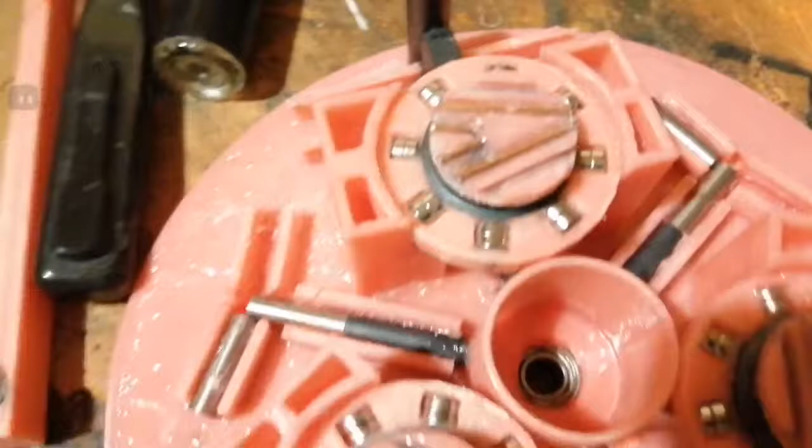So I made this actuator. Obviously I need to make a top bearing holder to stabilise this, because this thing just flops about in the bottom bearing, which is out in the middle down there. One bearing is not sufficient to hold this thing.

So I'm starting to hit a few design constraints and problems. I expected I would, because I was putting too many big magnets on here, so I'm in two minds right now about whether to go back to the drawing board and redesign this in a different way, because this was designed just for testing purposes really, for the other magnets. It wasn't designed for these great big bulky concentrics.

The problem I get is the interference, because if I add too much magnetic flux, especially if there's three magnets like in the stator, right...

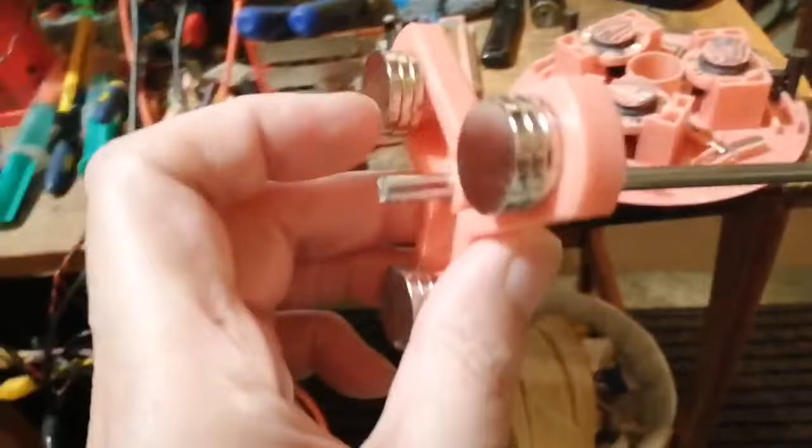Just give me a sec, I need to take the drive shaft out because I want to show you what I mean.

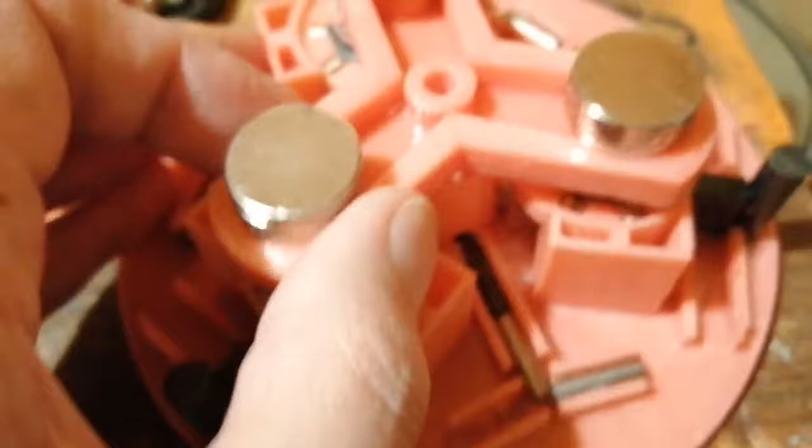Sorry about this, I'm taking the drive shaft out because the shaft's too long and it hits the table. So if I stick this on here like this, we have pretty good coupling actually.

We can see it deflecting on the thing, but the problem is, even when this is in the neutral position... oops, hang on a minute.

There's a reason I took it off the drive shaft, and that's because I want to be able to put it in a different position without it snapping in, and the bearing would make it spin a bit, if I can get this in the middle where I want it to be.

But basically what happens when it's in the middle like this is we get interference, as in it's good, it's stabilised now. Where's my gauge gone? I don't know where my magnetic gauge has gone now. Oh, there it is.

So even with this in the off position, we are still getting some deflection on here, which is what I'm talking about, the interference. Because even though the magnets are all the same pole, and because the magnets are more powerful now, I'm getting unwanted coupling, so it's still basically on when I want it to be off, if you see what I mean.

So this is one of the issues, because the spacing is not quite right, and I can't get these things far enough away. That's the problem.

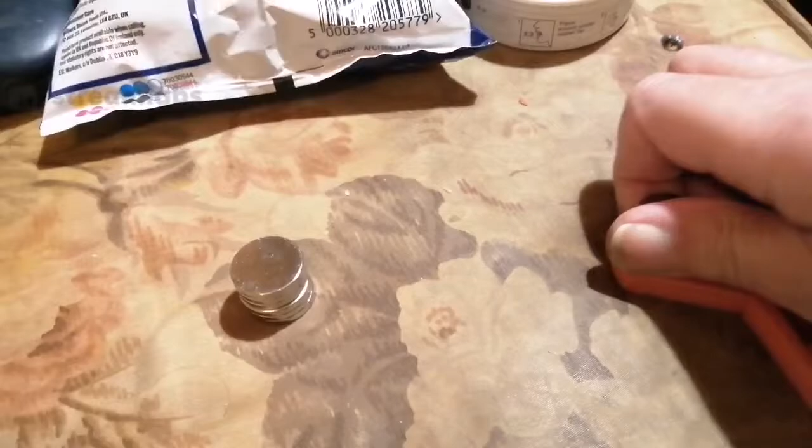But it works fine if I take all these extra magnets off, because I put them on the back. I'm trying to do this without actually pinching my fingers... ouch! Which I did anyway. Ouch!

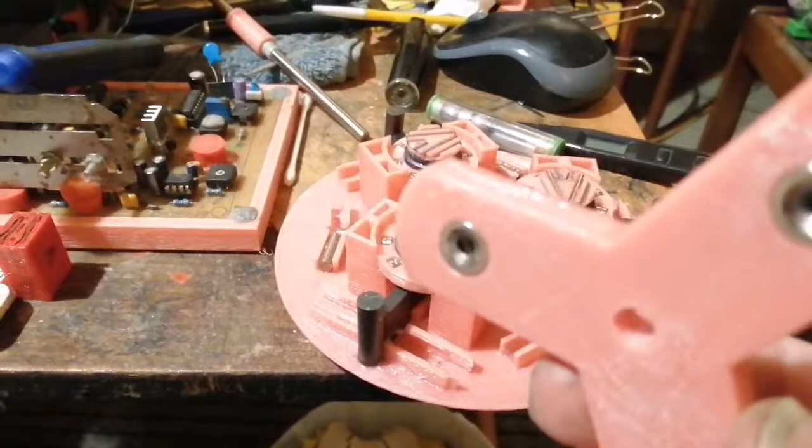Right, so just with the three -- there's actually three 10mm magnets in each one of these holes now, just those -- it behaves a lot better, but we don't get...

Hang on, we don't get a great deal of coupling through. Even when I tilt this back, there's not sufficient flux to give us enough through there.

This is what I'm talking about, it's because of the spacing. I need these concentrics ideally to be mounted instead of horizontally, they need to be mounted vertically with the piece of ferrite going through them instead of at the side, because I've got a coupling issue.

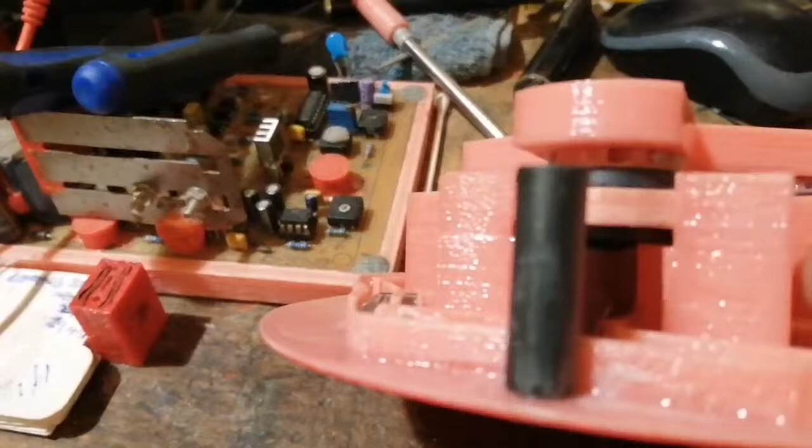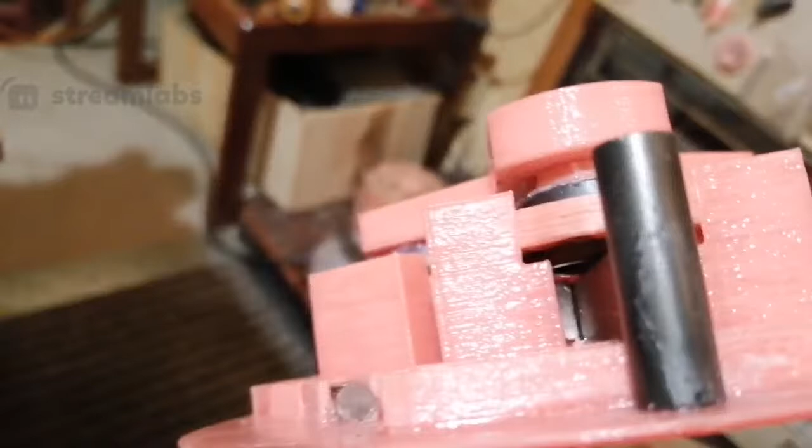You can't really see this, but if you look down there, there's a bit of ferrite sticking out the bottom of those concentrics. I don't know if I can get the light on it. You might be able to see it, onto that bit of ferrite bar. Yeah, you might be able to see it, there's a little bit of ferrite sticking down.

Now there's a bit of a gap on some of them as well, which is not great, because I did manage to find some bits of ferrite that was already cut, which were about the right length.

As I say, I'm not happy with it. The coupling is just not there, it's not good enough. If I add more magnets, I get too much flux, where it's basically on all the time. Because this thing needs to be either larger, or we need to have these concentrics on a different axis so that we don't get this interference problem, which is what we're getting.

If the magnets were perpendicular, as in pointing outwards instead of down, then we wouldn't get this cross field contamination, because that's what's happening. We're getting the fields merging, you see. We're getting a bit of cross field contamination because the magnetic fields aren't switching properly because of the space being so close.

So yeah, I thought I'd give you some heads up on what I'm going through at the moment, why I'm printing parts. I printed all these legs, these things. I made them quite lightweight so they wouldn't use a lot of plastic. The idea with these is that I would glue these.

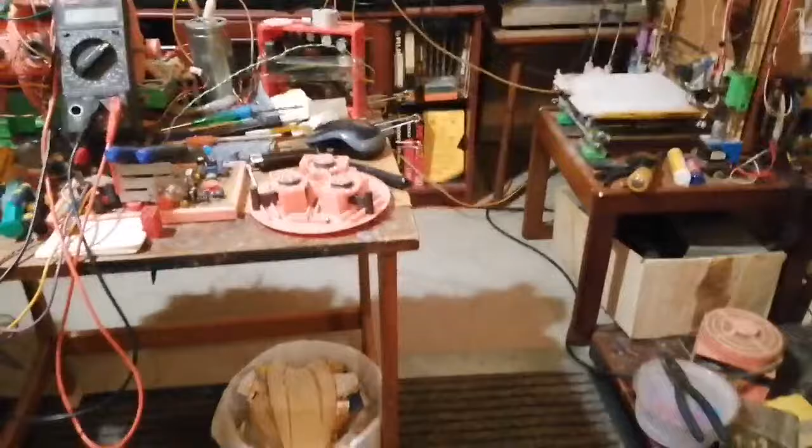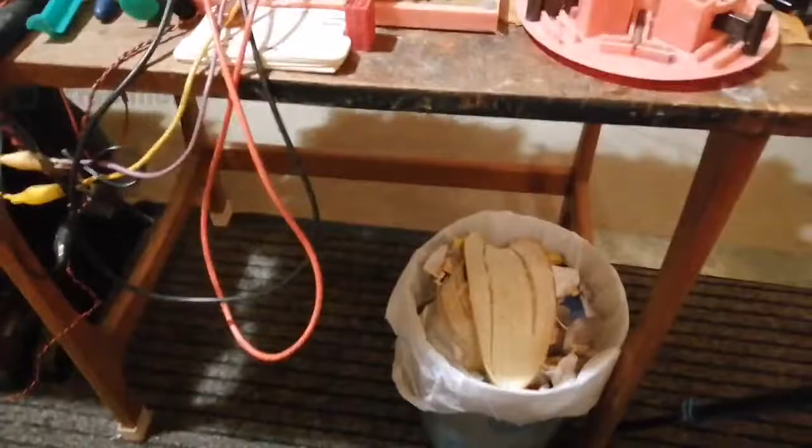Yeah, but if I can, maybe I just wanted to make this a quick video really, but just a minute, I'm just getting my camera stand. I just want to take the cover off a minute. I want to try to show you a little bit more, but hang on. Bloody thing. Alright.

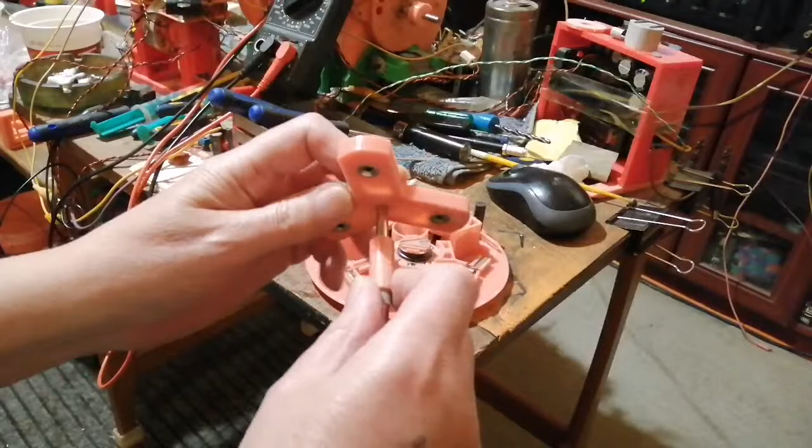So yeah, this is what happens when you change direction in midstream sort of thing, because that's what happened. I've got the stand on now. I designed this for a different setup, and now my setup has changed and my model hasn't, and I've been trying to adapt this model to suit. Well, obviously it's not going to work because it's too closely coupled.

I mean, yeah. And I don't like the fact that I've got to make this. I should show the SketchUp actually. Let me just show the SketchUp model while I'm at it, what I've done so far, you'll see what I mean. It's getting a little bit crazy.

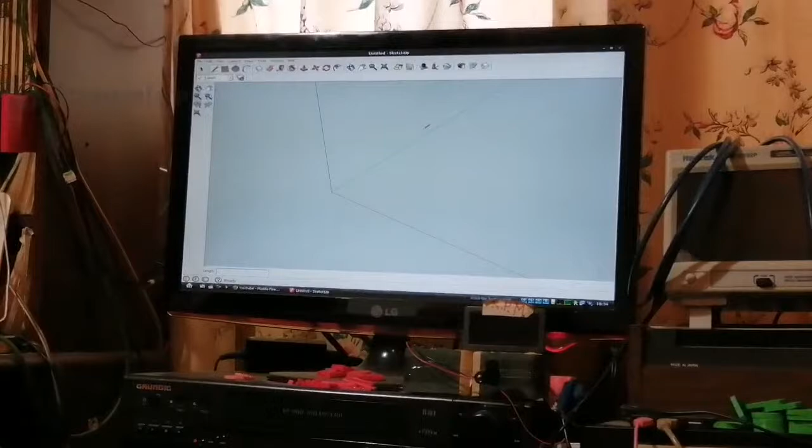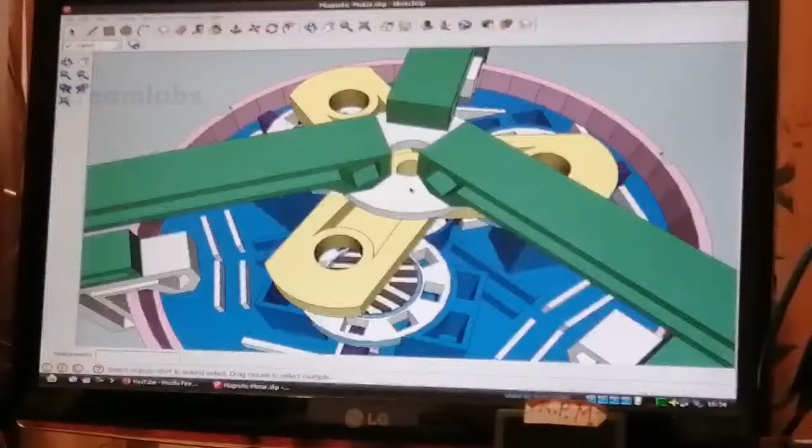Right, let's just zoom in a minute. Let me load it as well. You see what I mean? It's getting a little bit crazy. I've got this bearing, this white thing on top, for the bearing. Now I've got these great big overhanging arms which are supposed to be glued or double-sided taped on, or I could screw them on, or attach something on the backs of these to hold them together, but it's starting to look a bit crazy.

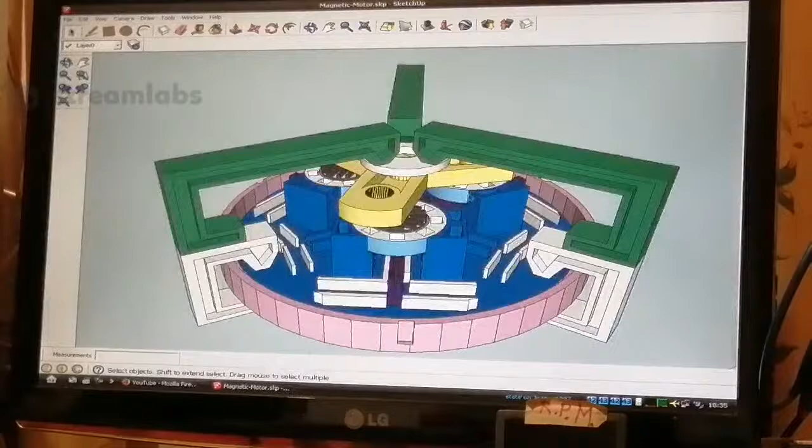So I was trying to adapt this thing, and then I thought, well, these magnets need to be bigger anyway, and I can't now. Then I realised, well, I can't go any higher now because I made the brackets.

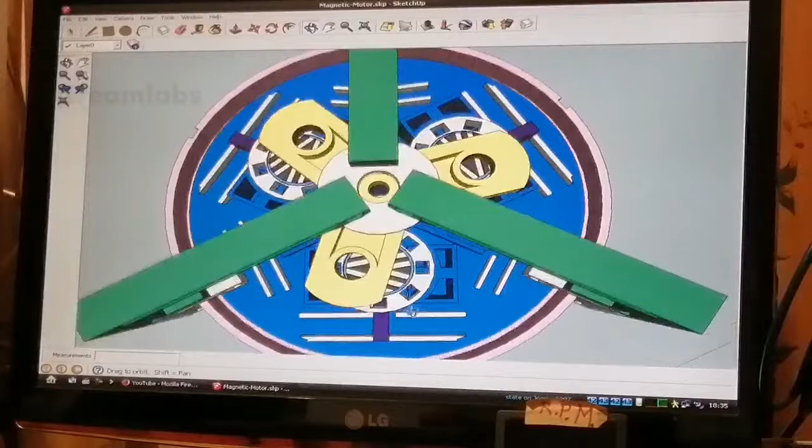So yeah, that's what I ended up with when I was prattling about. I'm thinking, oh my god, I'm just adapting, and it's like correcting errors over tops of other errors and trying to fix it.

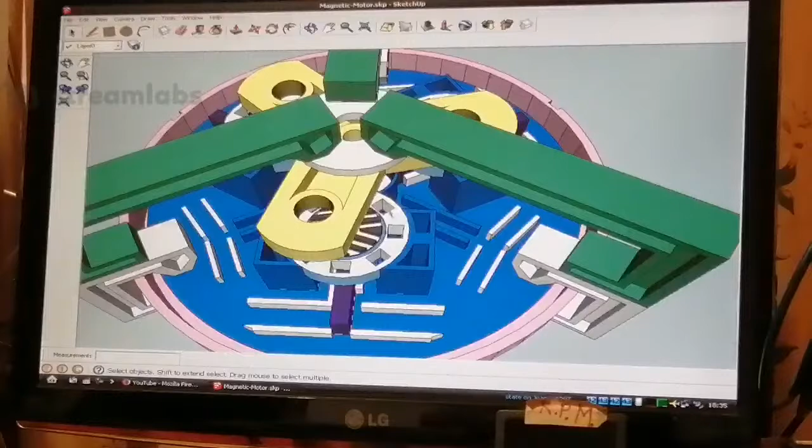I'm going to go back and remodel something completely new using the concentrics that I built. If I design something around the concentrics, I can make sure I don't have the magnetic field contamination problem.

But at the same time, I want to try this thing. I want to just get this top bracket done and see if it actually does anything, if it actually works. Because if it doesn't work, then I'm going to be wasting my time designing another model. You see, this is where I am right now.

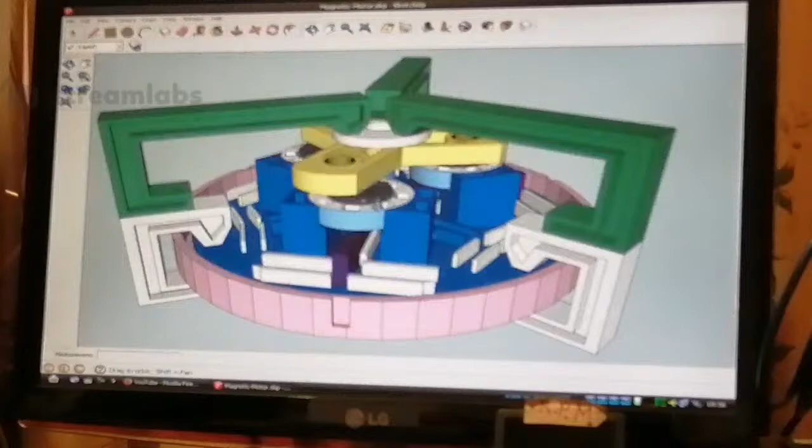My head's in a bit of a spin. So I'm thinking, can I make this thing work just to prove that it'll work? I think I might be able to, but there's all this extra flux going around with the bigger magnets, so I can't use the bigger magnets, I've got to use the smaller magnets.

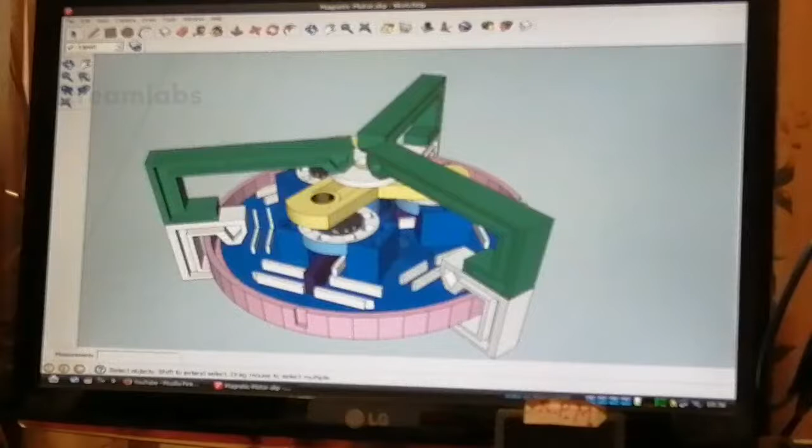And I've got to make sure these bearings run really easily, otherwise it won't run because the magnetic field is spilling over. You see, if you get two bars, and you stick a magnet on one bar and hold another bar next to it, that other bar is going to pick up that field.

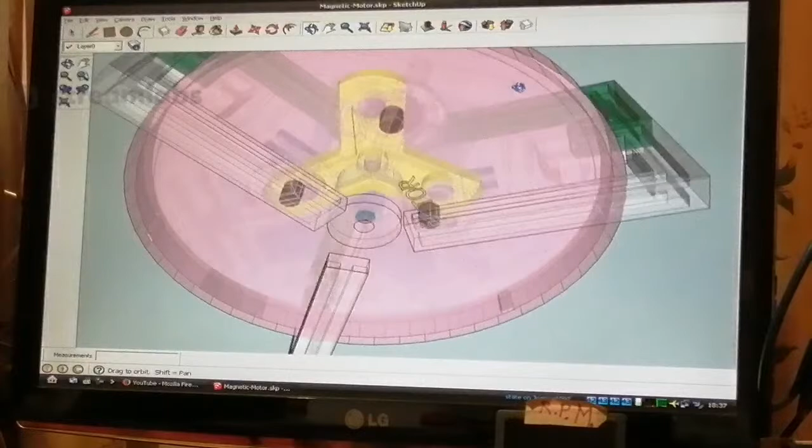If we go to X-ray view, those bars... oh, you can't even see them through the X-ray view. You can just about see them. Those bars go to the central axis point.

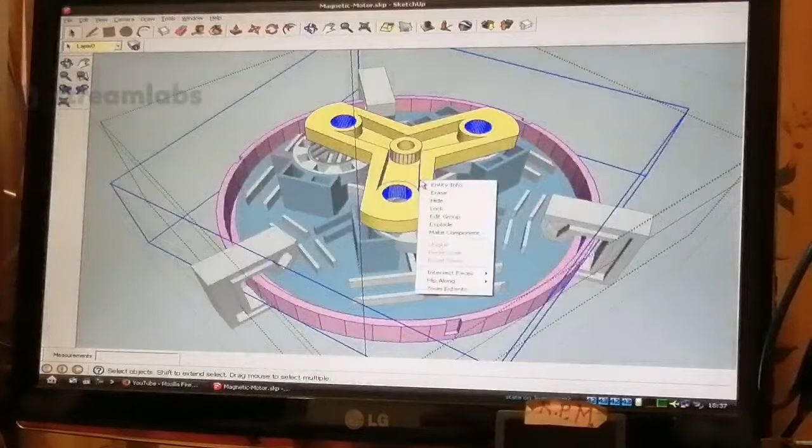Actually, let me back out a minute. Let me just hide some stuff and I'll show you what I mean. Edit group, hide that. Oops, I went and locked it. Silly me, undo lock. Just want to hide it.

So you can't see the bars on here because they're not... oh yes, they are, they're in there. Let's just go back out a minute and see if I can hide these things. I'll hide that.

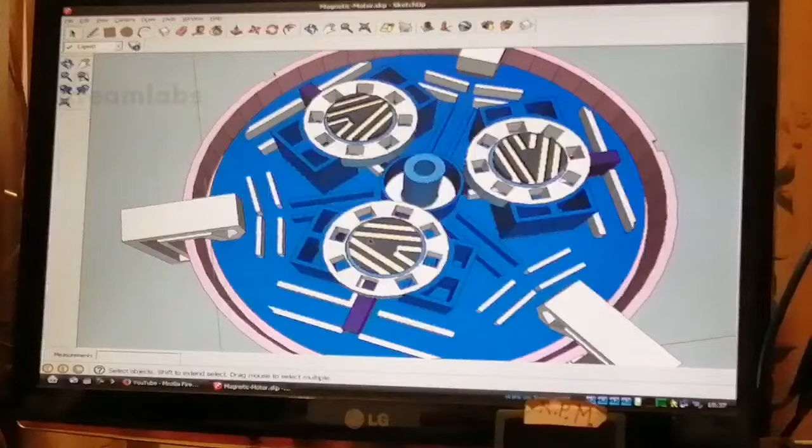Right, you see this bar down here? This is a bit of ferrite that's coupling to the concentrics. This bit of ferrite right here that's grey, now it's coupled onto the ferrite bar, which is the purple colour. This purple thing is a ferrite bar.

Now originally my design was to have the magnets in the middle. Do you remember? It was a vertical pillar with the magnets dropped down and coupling against these bars. Well, now I'm not using that method anymore.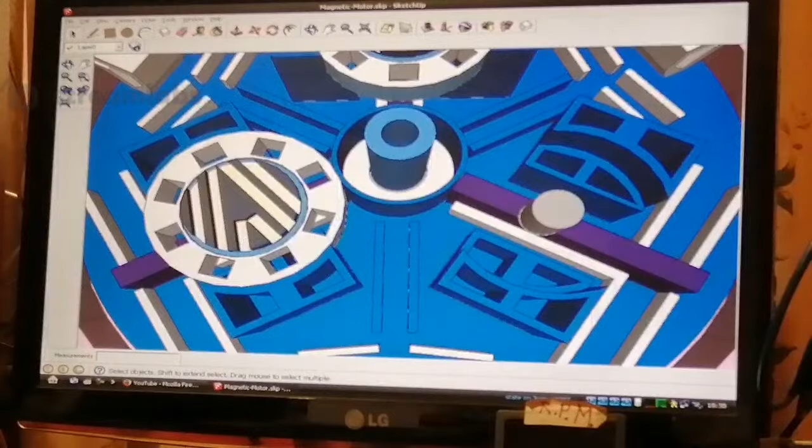These bars are picking up the magnetic field from the really big magnets that are on top here. Even across here, if the magnets are in the middle, these bars are still picking up the magnetism, you see. That's what the problem is.

Yeah, because the bigger the magnets are, the more these flipping bars pick it up, even when I don't want them to. So that's the issue I'm dealing with right now.

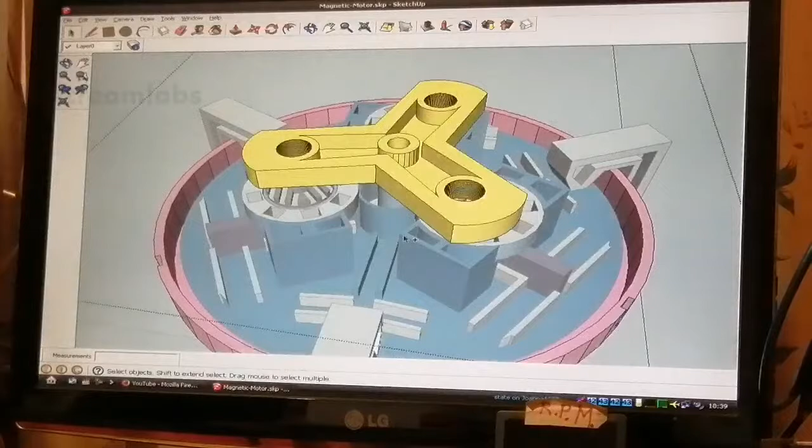So I'm just going to undo all that in a minute, go back to where I was. You can see my dilemma.

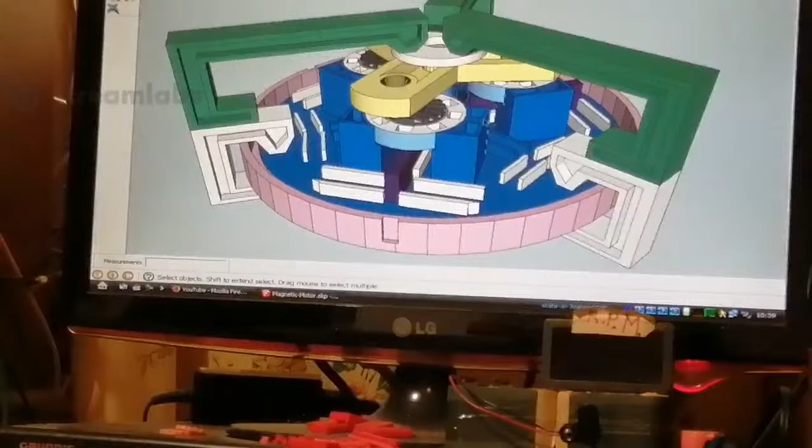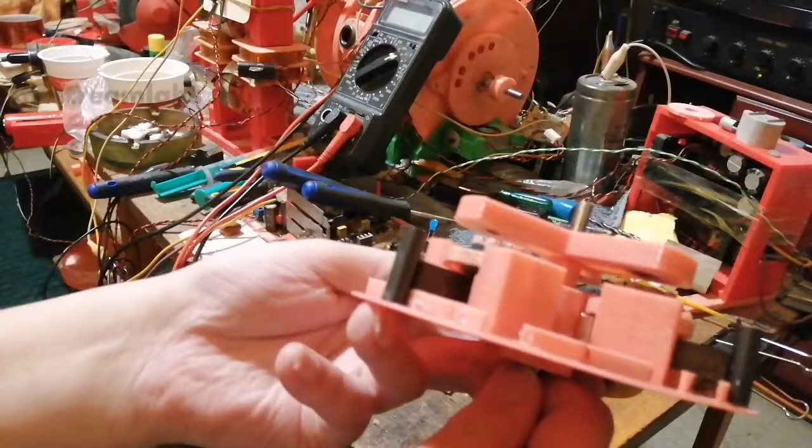So anyway, I'm going to sleep on it. Let me just zoom in again a minute, zoom out I mean. So at the moment, I haven't got a top bearing and it flops about, so I can spin it, but

I ain't got the rotor on, obviously. And that's another thing - the rotor spacing on the magnets was for the other arrangement, and the magnets are all spaced in the wrong places. They're not designed for the three magnets to line up all at the same time, they're actually spaced.

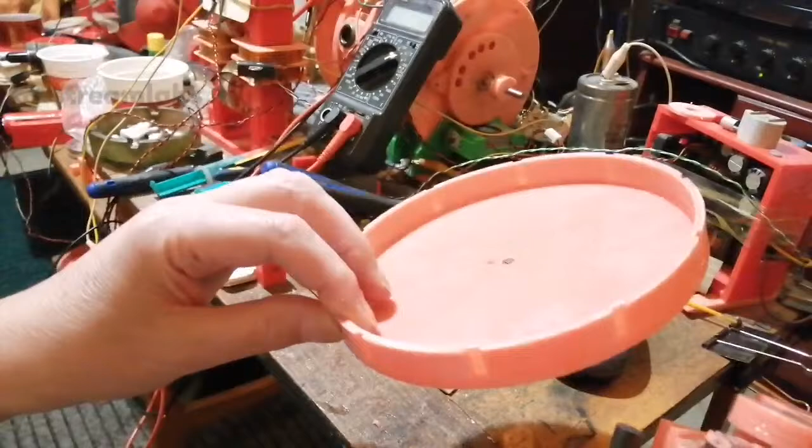Well, this is the new rotor that I did, and there's 10 of them. You do the math, there's 10 magnets. It's not an even 2, 4, 6, 8, 10 - that is an even number, yes, but think about that. We need an odd number because it's 3.

We want 1, 3, what was it, 5, 7, 9. We need to multiply it in odd numbers, not even numbers. So my rotor is set wrong. All the magnets are spaced wrong, so it's not going to time right.

I can't time it with this setup, so I'm really getting frustrated now. It's really doing my head in. Right, even maybe 2 of the magnets would line up right, but it's not going to be any good. But at least I got some of it sorted. I can see there's not much drag there.

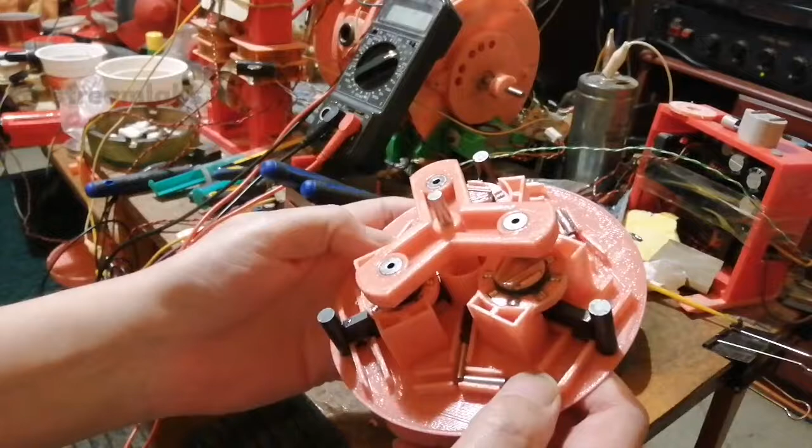Anyway, I'm going to sleep on it, and then I'm going to see if I can come up with a better design.